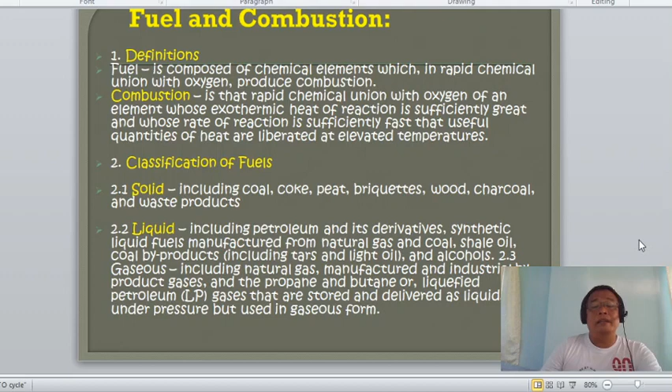We have also the classification of coal. Classification by rank: this is the degree of metamorphism or progressive alteration in the natural series from lignite to anthracite. The lowest level of coal is lignite. Others are subbituminous, semi-bituminous, bituminous, semi-anthracite, anthracite, and super anthracite.

It is probably the most universally applicable method of classification, in which coals are arranged according to fixed carbon content and calorific value, calculated on the mineral-matter-free basis. Another is classification by grade: quality determined by size designation, calorific value, ash softening temperature, and sulfur. The size designation is given first in accordance with the standard screen analysis method, followed by calorific value and symbols representing ash softening temperature and sulfur.

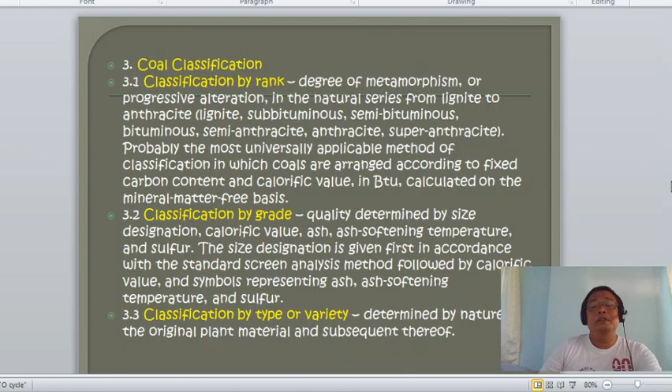Classification by type or variety: determined by the nature of the original plant material and subsequent alteration thereof.

Another, we have the burners for pulverized coal. This is now in a steam generator plant, in the furnace. We have vertical firing, with all the secondary air admitted around the burner nozzle so that it mixes quickly with the coal-primary air mixture from the burner nozzle.

Another is impact firing, a form of vertical firing consisting of burners located in an arch low in the furnace or in the side walls and directed toward the furnace door with high velocities of both primary and secondary air. This type of firing is used exclusively in wet bottom or slagging type furnaces.

Another is horizontal firing. It employs a turbulent burner which consists of a circular nozzle within a housing provided with adjustable valves, the unit being located in the front or rear wall.

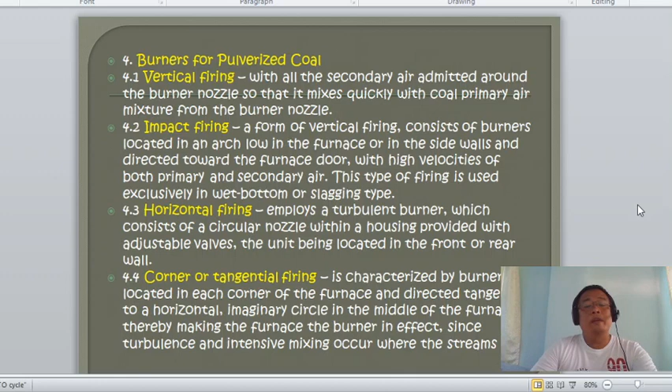Another, we have corner or tangential firing. This is characterized by a burner located in each corner of the furnace and directed tangent to a horizontal imaginary circle in the middle of the furnace, thereby making the furnace the burner in effect, since turbulence and intensive mixing occur where the streams meet.

We have also coke. What is coke? The solid infusible residue after bituminous coal is heated in the absence of air above the temperature at which active thermal decomposition of the coal occurs. We have pitch coke or petroleum coke, obtained by similar heating of coal tar pitch and petroleum residues.

We have high temperature coke, made from coal at temperatures ranging from 815 to 1093 degrees Celsius. Another, we have low temperature coke, formed at temperatures below 704 degrees Celsius. Another is charcoal. Charcoal is produced by partial combustion of wood at about 400 degrees with limited air.

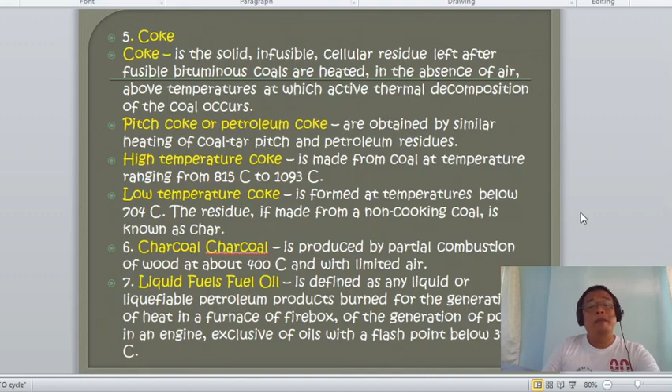Liquid fuel, or fuel oil, is defined as any liquid or liquefiable petroleum product burned for the generation of heat in a furnace or firebox. Four classes of fuel oils in common use: residual oil, which are topped crude petroleums or viscous residues obtained in refinery operation.

Other is distillate fuel oils, which are distillates derived directly or indirectly from crude petroleum. Another is crude petroleums and weathered crude petroleums of relatively low commercial value. Another is blended fuels. Another, we have the commercial fuel oil specification: grade 1, grade 2, 4, 5, and 6.

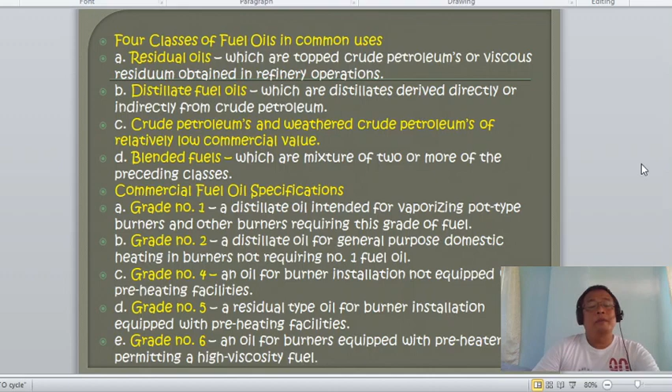Grade 1 is a distillate oil intended for vaporizing pot type burners and other burners requiring this grade of fuel. Grade 2, a distillate oil for general purpose domestic heating. Grade 4, an oil for burner installations not equipped with preheating facilities. Grade 5, a residual type oil for burner installations equipped with preheating facilities. And grade 6, an oil for burners equipped with preheaters permitting high viscosity fuel.

Another, we have now gasoline, commonly used for an Otto engine. Gasoline is defined as a refined petroleum naphtha which by its composition is suitable for use as a carburetant in internal combustion engines.

Motor gasoline: a mixture of hydrocarbons distilling in the range of 37.7 degrees to 204.4 degrees Celsius by the standard method of test. Okay? Another is kerosene. Kerosene is defined as a petroleum distillate having a flash point not below 22.8 degrees Celsius, as determined by the Abel tester, and suitable as an illuminant when burned in a wick lamp.

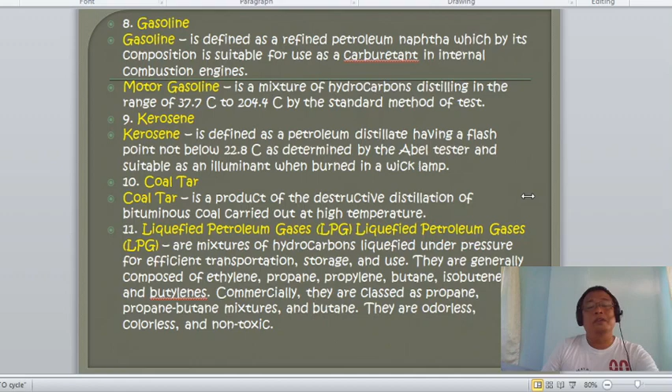Another is coal tar. Coal tar is a product of the destructive distillation of bituminous coal carried out at high temperature. Another is LPG, liquefied petroleum gas: a mixture of hydrocarbons liquefied under pressure for efficient transportation, storage and use. Another we have the diesel fuel. Of course, diesel fuel is an oil or a fuel used for a diesel engine.

So we have here A, B, C. Distillate fuels are produced by distillation of crudes. Residual fuels are those left after the distillation process. Blended fuels are mixtures of straight distillate fuels with cracked fuel stock. So what is a cracked fuel stock? Residual fuels which have been treated thermally or catalytically to obtain a yield of lighter grade fuels or gasoline.

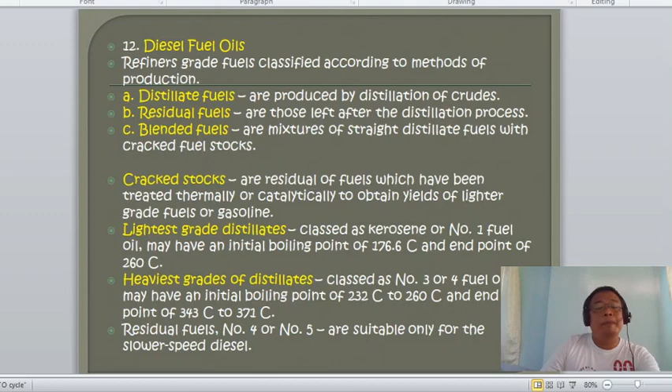The lightest grade distillates are classed as kerosene or number 1 fuel oil, with an initial boiling point of 176.6 degrees Celsius and end point of 260 degrees Celsius. Then we have the heaviest grades of distillates, classed as number 3 or 4 fuel, with an initial boiling point of 232 to 260 degrees and end point of 343 to 371 degrees. Residual fuel number 4 or 5 is suitable only for the slower speed diesel.

Another, we have the gaseous fuels, commonly used in industry whether distributed by public utilities or produced in isolated plants, composed of one or more simple gases in varying proportions. Another is diesel lubricating oils. Crude oils are frequently described as paraffinic, naphthenic, or mixed based according to physical characteristics of the crude. There are two broad types of oil: straight oils and additive oils.

Straight oils are produced entirely from crude chosen through elimination of undesired constituents by suitable refining processes. Additive oils are produced by adding to straight mineral oils certain oil-soluble compounds that enhance the lubricating oil properties for use in a diesel engine. What are these additives?

They are used principally to inhibit or slow down oxidation, to increase film strength, to keep solids in a finely divided state and hold them in suspension, to improve the viscosity index, lower the pour points, to decrease friction and wear under extreme pressure conditions, to reduce foaming, and as rust or corrosion inhibitors.

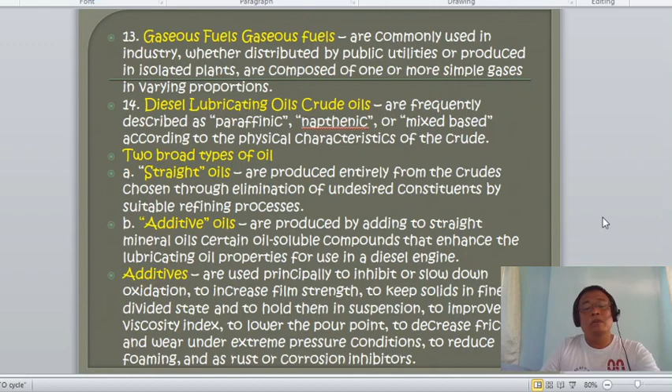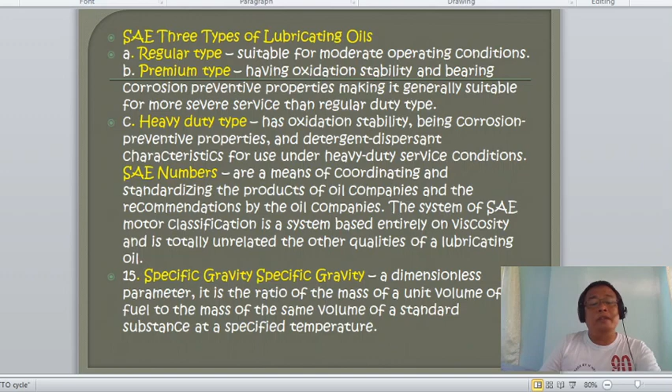Another is the specific gravity, a dimensionless parameter: the ratio of the mass of a unit volume of the fuel to the mass of the same volume of a standard substance. The standard substance, of course, is water for liquid fuel. So specific gravity equals the density of the liquid fuel divided by the density of water. For gaseous fuel, it is the density of the gaseous fuel divided by the density of air. Take note that the standard liquid is water, and the standard gas is air.

Another, we have the specific gravity of the fuel at temperature T, which was already discussed in the first presentation in power plant engineering. The specific gravity at temperature T equals the specific gravity at 15.6 degrees Celsius, or 60 degrees Fahrenheit, multiplied by 1 minus 0.0007 times the actual temperature minus 15.6. This is in SI.

In English units, the specific gravity at temperature T in degrees Fahrenheit equals the specific gravity at 60 degrees Fahrenheit multiplied by 1 minus 0.0004 times T minus 60. That is the formula for determining the specific gravity of fuel at different temperatures. Take note of this formula because in the other presentation we will use it for actual calculation.